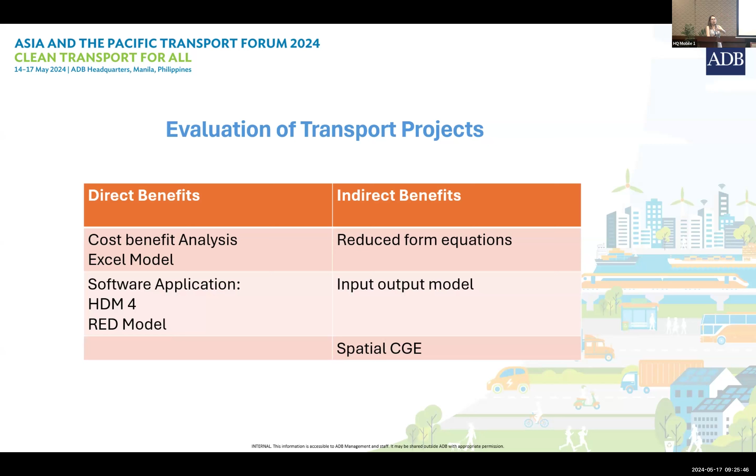And then the spatial CGE, computable general equilibrium model, which is sometimes used in projects - later I'll show you one quick project that has used the spatial CGE. This is location-based, so you have information on where the transport investments are located. You need information on a lot of things: population, land use, where the firms are located, where the houses are located, etc.

So benefits to be quantified - you would see that here. Direct benefits - I think everyone in the room knows more of this.

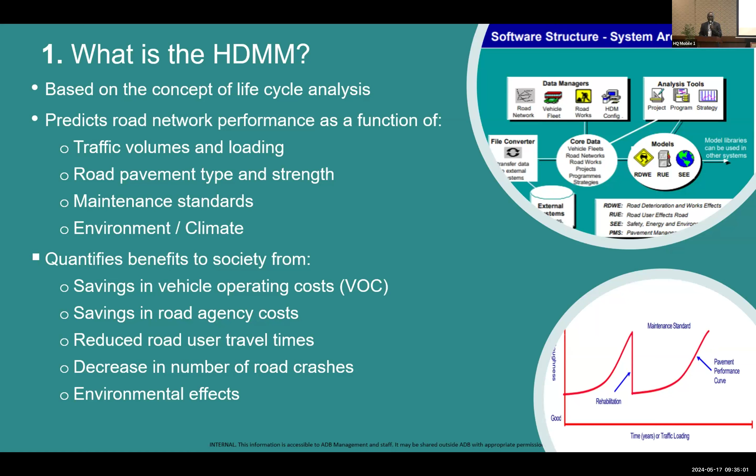After that, it quantifies the benefits to society from savings in vehicle operating costs, savings in road agency costs, reduced travel times, decrease in road crashes, and environmental effects. It applies this based on a life cycle approach. The analysis framework is still very sound actually, and we continue to use it up to now, and it works well, but things have also been changing.

So why really do we need to change? Many things. In ADB, we know that the road management landscape has changed a lot over the last few years, so the demands we're receiving from our client countries is now very different.

How do we address climate change? How do you address climate resilience? Some clients want to move into area-based maintenance contracts, so how do we make the case for those contracts? In ADB, most of our road investments at the moment are project investments, so we basically support countries in building roads and upgrading them.

But as you heard from the previous years, the portfolio for transport has changed drastically, and what we're hearing from our clients is they now want to move to system management and asset management. So we need the kind of tools that can justify this kind of investment in new areas, and that's why we're very keen to support this.

There are also many other factors. Technology has moved on, so the current HDM4 technology is probably becoming obsolete and that needs to be addressed. There's more computing power and so on. Many things have happened over the last 20 years.

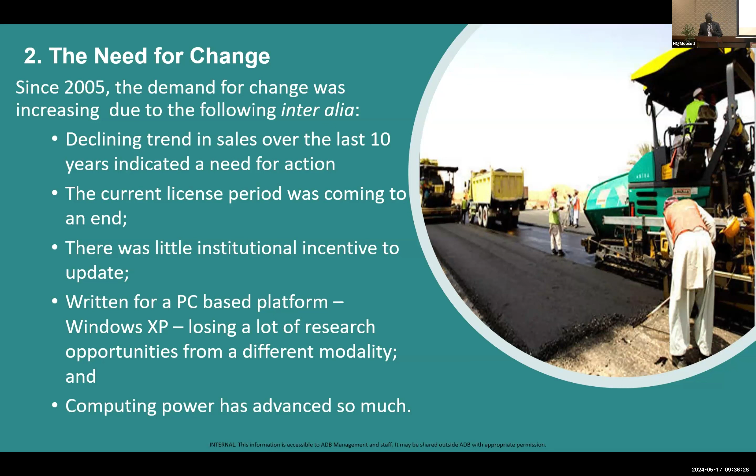In addition, there's a need to understand better how to model pavement deterioration and works effects. I work quite a bit in Mongolia, and what we are seeing now is the implications of permafrost on the performance of roads. We've not seen this before, but roads we're building are failing as a result. Even existing infrastructure is affected—if you go to parts of Mongolia and into a hotel, look carefully at the walls, you start to see cracks already happening, because increasing temperature is allowing this permafrost to melt.

This happens to many things. There are new materials that have come into play that were previously not being modeled in HDM4. We need to understand those. We need to model emissions better at all the various stages of emission modeling, and road safety benefits need to be quantified better, not in the way it is currently done. There are many things that should be addressed, and wider economic benefits, which Rowena just spoke about, also need to be considered.

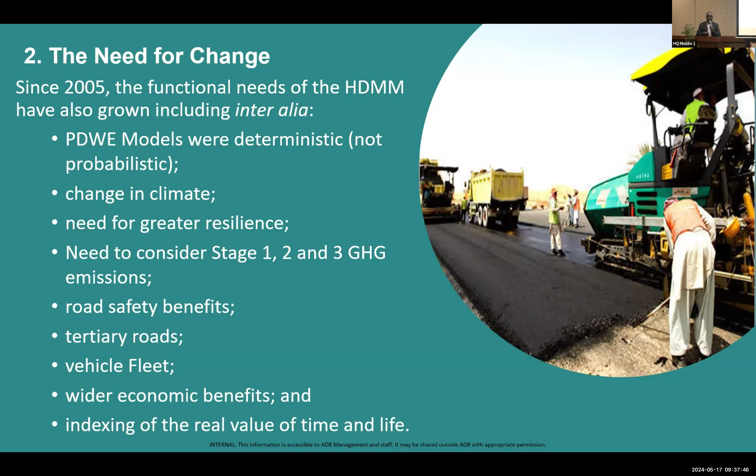During this period also, there's been a lot of work in this area, so we need to go back, understand what has been done, and then see how we can include those into the new model.

So I'll now talk about how the change is being implemented. A steering committee has been established, and ADB is part of that steering committee—you can see Jimmy is part of it too, good timing. The aim of the steering committee is basically to provide direction in HDM development. We meet periodically, typically every quarter, to discuss the developments.

Now, membership of the committee at the moment is limited only to partners who are providing support directly or in kind to ADB. But I understand from the rest of the committee that other members are welcome. So if the organizations here may be willing to provide this support, you're still welcome to participate.

So at the moment, it's the World Bank which chairs the committee. And then we have the UK FCDO, ADB, PIARC, EIB, and then African Development Bank is also coming on board, but they're yet to confirm.

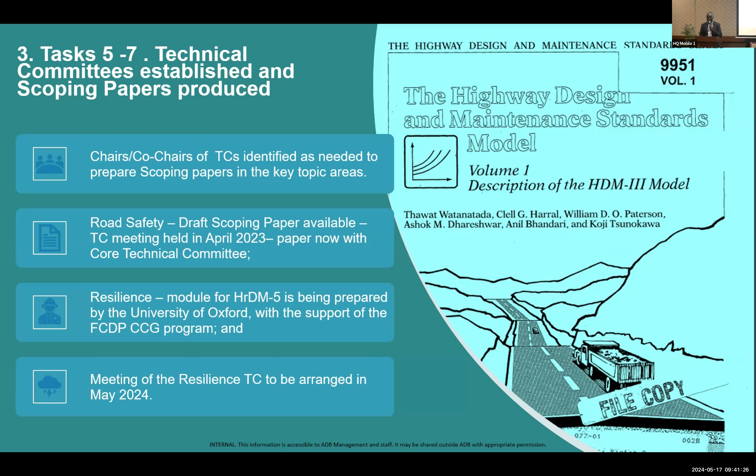So the resilience work is being done by Oxford University, who are preparing the methodology for that with the support of the FCDO Climate Compatible Growth Program. And we'll have a meeting soon to discuss that progress.

So in terms of the current status, just to highlight the IT architecture: the aim is that HDM5 will be a cloud-based system, okay? And there'll be a web-based interface where each individual user will be able to prepare their own particular project.

But the aim is to then leverage a lot of the work that is being done elsewhere. So for example, link tools developed by others, whether it's emission tools that have been developed, these could then be linked into that cloud-based system.

And also be able to draw on data that are being maintained by others. So OpenStreetMaps, digital elevation models - if we wanted to extract, let's say, gradient data, that could be drawn from there. Vehicle attributes, vehicle speeds, maybe from TomTom or Google.

The idea is that, and I think this, if it works, would be very helpful, because one of the main challenges you've been having with HDM4 is normally the perception that it requires a lot of data to deliver. But if you can leverage some of this data in a manner that can be used properly, then I think this is a good thing.

And then also it'll allow for integration of different types of tools, like the road safety tool being developed with the World Bank, so that could be integrated as well, and other tools. But in addition to that, we have to look at new models that need to be delivered.

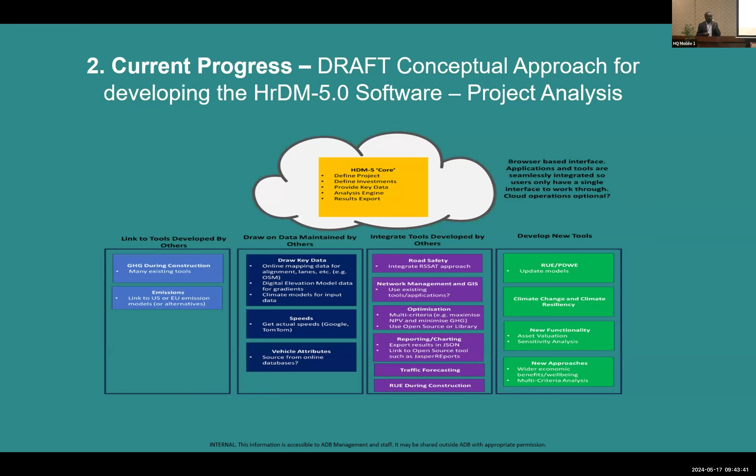So I'm not going to spend too much time on these, but just to highlight that there'll be a consortium, firm or entity, to develop this IT architecture on a design, build, operate, transfer basis.

So what we need to do is transfer the IP rights to them so they can do the development. When we looked at whether there's existing IP rights for HDM4, we could not find any because it's probably lost in the record somewhere.

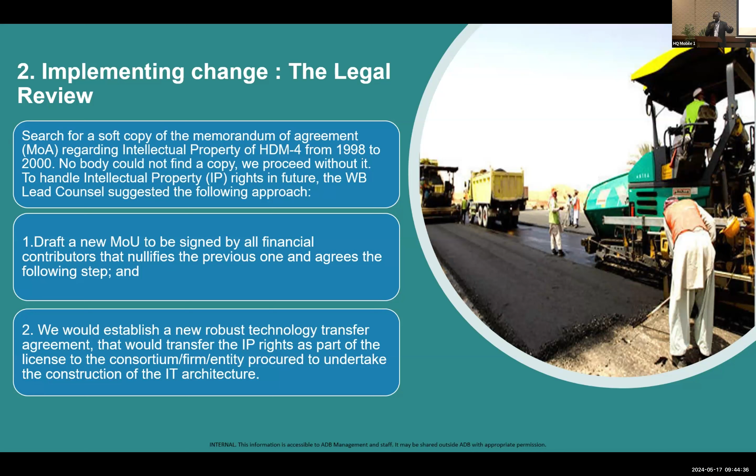So some legal work is being done where legal experts will go back to the people who funded HDM4 before and ask if they can write off the rights and give it to the World Bank. The World Bank will then create a proper legal document and transfer that to the new concessionaire.

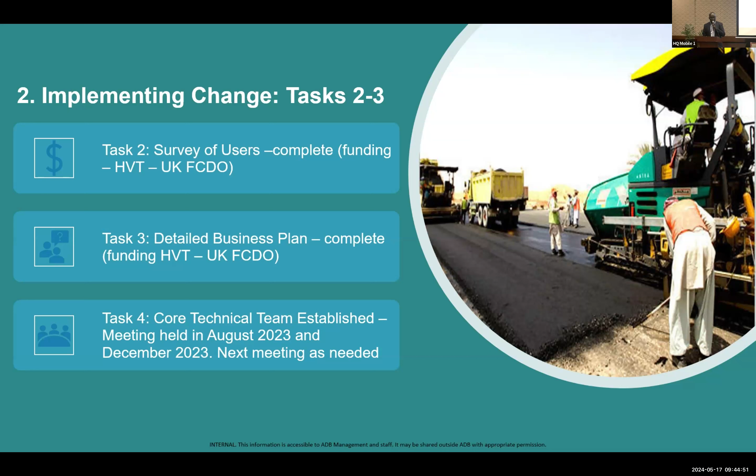So there's a lot of activities going on to support this. I'm not going to go through all this in detail. As I mentioned, this business plan has already been developed before, and the core technical team has been established. So these activities are going on.

In terms of current progress, a lot of studies, meta-analysis studies are going on. The World Bank have done a few that have already been published. ADB, myself, and Rowena should be starting to work together on some of these to produce meta-analysis which will support the wider economic benefits inputs into HDM4.

In terms of next steps, there are also works ongoing or under procurement to do a number of gap analyses in deterioration, user works effects, functional review of the software itself, and the terms of reference for the architecture has already been produced.

I think it's now in the EOI stage for the firm that will design the IT architecture that I showed earlier. I want to mention that was probably the most difficult aspect to do from a funding perspective. We required substantial funding to get that going.

So the government of Japan stepped in and they will fund most of the IT architecture design so we can move on. So that was good. That was particularly the main activity that delayed our development according to the original program.

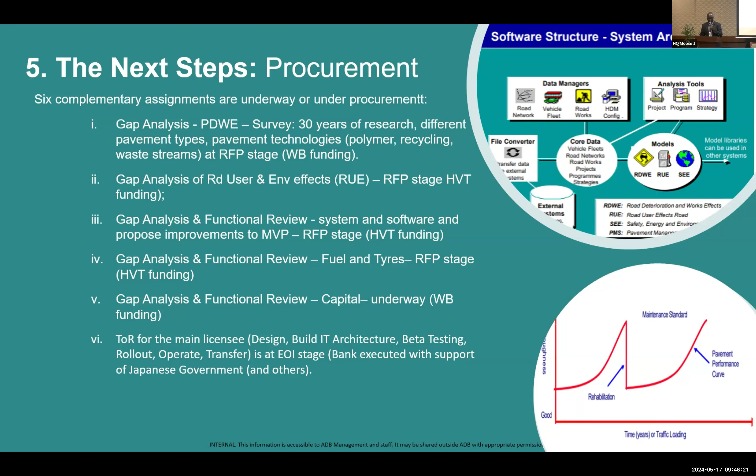Okay, so I won't go through that. I'll stop there, but just to mention there's also a website you can go to. If you have questions, you can share them with me and I'll try to find answers, whether from the World Bank or others, so we can get feedback to you, okay?

So I just wanted to give you an update on what's going on and let you know that HDM5 is coming. You can still use HDM4 perfectly well. It should not stop you from doing that. Thanks.

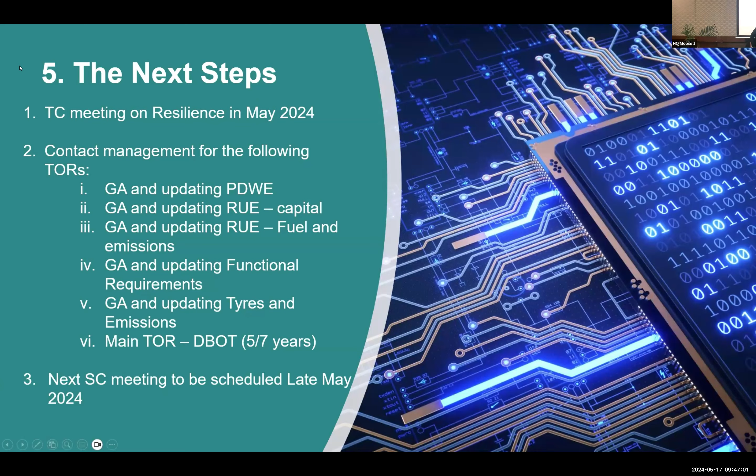Yeah, there's a few of us, I think, around the room and online that are involved in some of those studies. So my original work was on vehicle fuel emissions and fuel consumption vehicle emission modeling, and I'm updating that at the moment for one of the projects.

It's now my privilege to invite Professor Kerali, former professor—is it, what do you call it, do you still retain the professor? That doesn't matter—to the stage. As I said earlier, he's been involved with HDM4 for many decades, and after the University of Birmingham, went to the World Bank, ended up there for a couple of decades as a country manager. So his experience spans research through implementation through managing projects. He's here to delve more into HDM5 for us. So Henry, please.

Thank you very much, Ian, and good morning, everyone. My presentation will be very much building on what Michael and Rowena mentioned earlier. It's really to look at the scope of HDM5 and also to engage with you on what are the priorities from the perspective of the Asia and the Pacific countries.

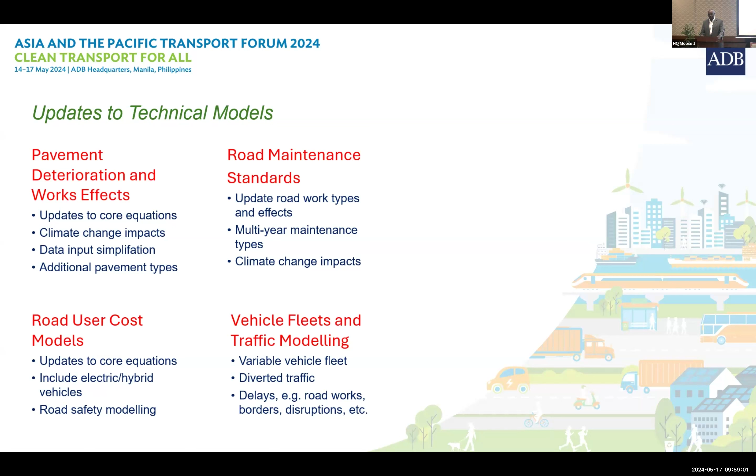One area that will need to be expanded is vehicle fleets. Rowena and Michael already mentioned the need to incorporate electric vehicles, which have completely different performance, obviously zero emissions, but there are other types of vehicles and fleets that need to be incorporated. Diverted traffic, for example, needs a network level analysis as opposed to looking at single roads.

And then finally, the enhanced capabilities. We talked about climate change impacts. There's also consideration of low volume roads. At the moment it's done using the RED model, as Rowena mentioned, but there's no reason it can't be done in HDM5 because the CBA framework is the same. So it's really about how you fine tune that into one tool that can cope with different types of roads you're analyzing.

Asset valuation has been talked about for many years, decades, but has never been incorporated in HDM. There's a thought that it could be done now. All the data is already in the system—your pavement characteristics, construction costs, and so on—so there's absolutely no reason you can't include asset valuation.

So these are some of the things that are coming up, which we will be discussing. There is a questionnaire which will be issued later—I think Ian will give that at the end of the sessions—which we'd like you to fill out from the Asia and Pacific point of view: what should HDM5 include, and what are the priorities for Asia and Pacific countries? The questionnaire will try to elicit your perspective. You may not be an expert on HDM, but you're a practitioner, so from that point of view, if you know HDM4, what is missing? If you don't know HDM4, it doesn't matter—what would you like to see in HDM5? I'll stop there, and the questionnaire will be issued later. Thank you very much.

Thank you. So, as Ian said, I have 30 years as an old acquaintance of HDM4, but I'm more a practitioner. I'm a consultant doing HDM4 for network analysis, policy development, and project analysis. Obviously, climate change comes up all the time as an issue, and there are some things we can do with HDM4 and some things we cannot do with HDM4. I wanted to give you some hints of what can be done for those who are already practitioners, and maybe give you some ideas on what you'd like to see in future HDM5.

First of all, we have to be aware that HDM4 is a pavement model. We are modeling pavement deterioration and then the effects of this deterioration on vehicle speeds and vehicle operating costs. That means, generally speaking, we are modeling deterioration over time, and we do not model sudden events. So we do not model disruptions. This is something we cannot do.

The second thing which we cannot do, because it wasn't included in HDM4 - and I'm advocating strongly to include it - is that we cannot very well model the absence of routine maintenance. For example, drainage works are essential in terms of climate resilience and climate adaptation. We all know the absence of drainage and routine maintenance will affect your pavement life. How to reflect this in HDM4 is not really straightforward these days. I made some small modeling and preparation for this workshop.

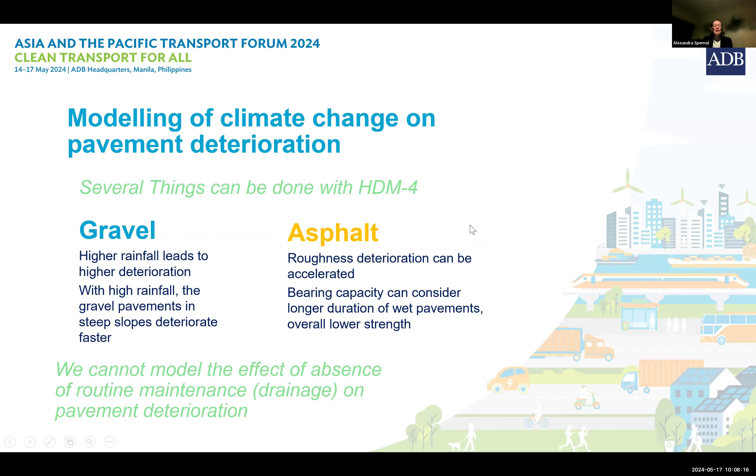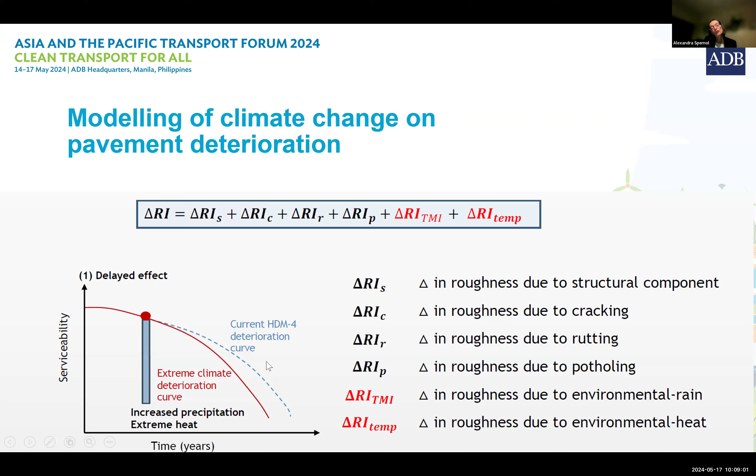So these are proposals for modeling climate change and pavement deterioration. As you know, we have roughness deterioration in a curve, which you can see here. The current HDM curve is the blue curve, and with extreme climate, our deterioration will be faster. We would still have roughness due to structural condition, cracking, rutting, and potholing, but we would include additional factors to model more closely the rainfall and the heat. That would overall accelerate the deterioration over time.

So I made some models. Like Henry said, the reporting in HDM might not be that good, but if you are good in Access and Excel, you can still see it.

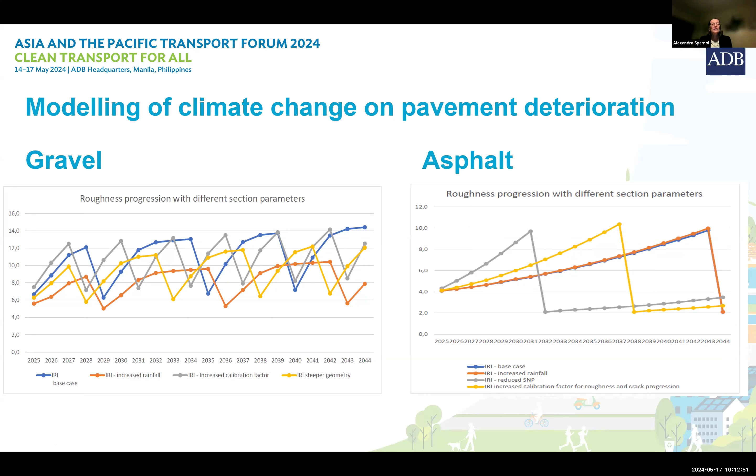And then you have the failure—that is the washout in case of flash floods for pavements, or bridges where the piers are failing under the high water.

These disruptions require implementing a detour. The problem is that we have to have a probabilistic approach. We don't know when these failures are going to happen, or even if they are going to happen. So we have to look at the likelihood of an event, and we have to look at the vulnerability - how much this will affect the people around.

What are the repair options? How long will they take? This applies to every single event - it can be a bridge failure, a landslide, mudflows, avalanches, washouts. The principle is that you stop your road not for 1 hour, 2 hours, or 1 or 2 days, but for serious time - the time to make emergency repairs - and people would be asked to use a detour, which can be more or less long.

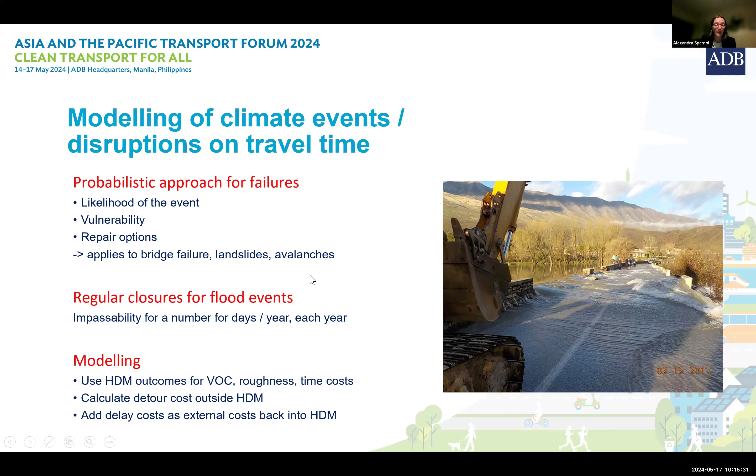In case of failures, the road will be unpassable for a short time. We don't imagine that countries would leave it - even poor countries like Laos have emergency response. Nobody would leave people completely disconnected for a long time, especially on a national road. So the short time is usually for light vehicles - you can put in place a detour in 1 or 2 days. If you have heavy vehicles, reinstating passability takes a little longer - most of the time we implement a Bailey Bridge or something similar. Eventually you'll continue to have load or speed restrictions for a long time - the time to reconstruct, the time to clear fully. For a bridge, that can take up to 18 months.

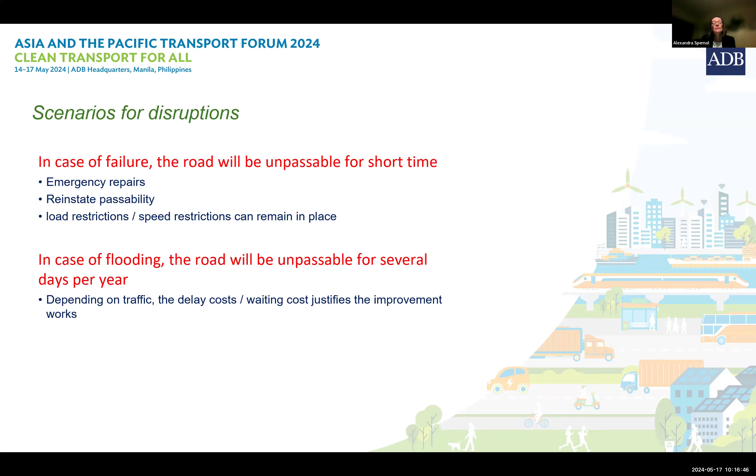Then I come back to the flooding and the delay cost. For regular flooding and regular closures, which happen every year, this is just delay cost and waiting costs. The interesting thing is that these costs are so high that they basically justify all climate improvements.

This is, again, my famous bridge, located on the Adriatic coast, on the Mediterranean Sea - my little bridge is the red point. It's on a national road that goes to Greece. If you want to use this road and the bridge is closed, you have to start your detour here to go into Greece on the south side, or start from here depending where you're coming, and go on the other side. The total detour, including different border crossing restrictions, is about 210 kilometers.

On this road, traffic in 2020 was substantial - we're talking about 7,000 vehicles a day, with substantial truck traffic. If we just close it for 1 day, we have a GHG cost of about $18,000, compared to $80 when you just cross the bridge for this 1 kilometer. Even compared to the 40-kilometer section where you take the detour, it's marginal - but the GHG emissions in the detour scenario are absolutely huge.

For this bridge, the reconstruction investment cost would be about $1.5 million, compared to $120,000 for 1 hour of waiting time with this traffic - this is cargo delay, plus working and non-working time of passengers. At $120,000 per hour, you can see that even in 1 day you've already recovered your investment.

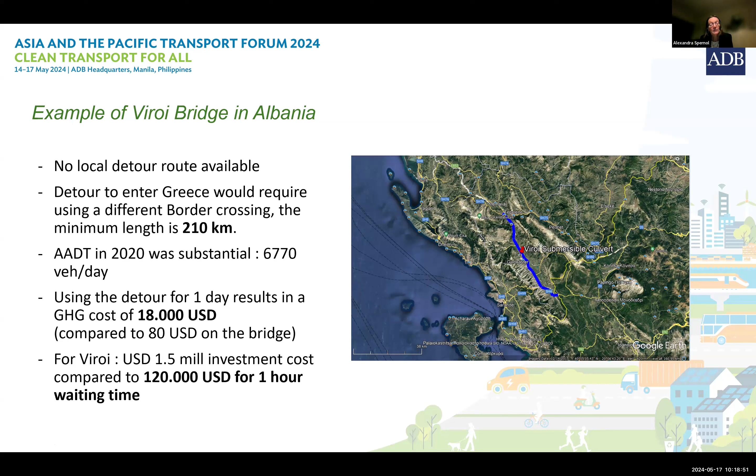I've tested this on many, many cases. And of course, if you have a rural road with a village of 20 people and 3 motorbikes, it wouldn't work anymore. But it would work on probably 90% of the infrastructure we are now managing in many countries, which we would typically model with HDM.

So even without an improved HDM5, this is my small conclusion: the climate effects which are affecting the deterioration over time can be taken into account. If you're good in HDM, you can fiddle around, adapt it, calibrate it, so that your climate effects over time can be taken into account, and we should do this.

But the disruptions, we cannot do anymore inside HDM, but we can do it outside of HDM. As I said, it's a very important economic cost, it would justify most interventions. The way of doing it is to model your road normally with HDM, then model the detour with HDM, include these, and then compare basically the economic costs and benefits of this option, including the reconstruction or not reconstruction.

And where the probabilistic thing comes in is that I can model the failure in year 1, in year 2, in year 3. And I can even say my failure is only 50%, so I would take only 50% of these benefits. And I can tell you that it still would work. Climate resilient investments can still be modeled and justified in this way.

Thank you, and I will give over to Theuns. Ah, no, you said you will do it after the break, right? Okay, yes, yes. Hopefully, first of all, thank you. Thank you, sorry for not being in Manila, but that's the best. That's okay, thank you.

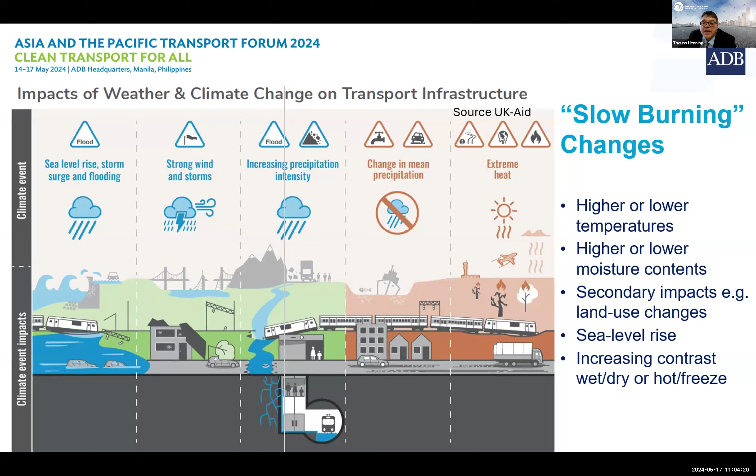There's definitely a place for HDM in looking at the impacts of shock events, but what we often find from a financing perspective is that shock events would be covered under emergency funds, whereas changes happening slowly over time are often not catered for in any specific financial instruments. So that is why this is so important.

So what I'll be talking about are the typical pavement issues that may occur as a result of climate impacts: increased potholes, rutting, cracking - with cracking in particular from freeze-thaw actions - and then raveling or chip loss of surfaces.

Now, one thing that came out in the previous session that was quite a good discussion is that climate is just one of the impacts. We also see many countries in Southeast Asia faced with poor material quality, in some cases poor construction quality, and extreme heavy vehicle loading. I've done some work with Ian in Indonesia, and there we were really astonished by the vehicle overloading problem they're struggling with, lack of maintenance, and then on top of that, the climate. So we need to incorporate some of this thinking when we get to the modeling side of things.

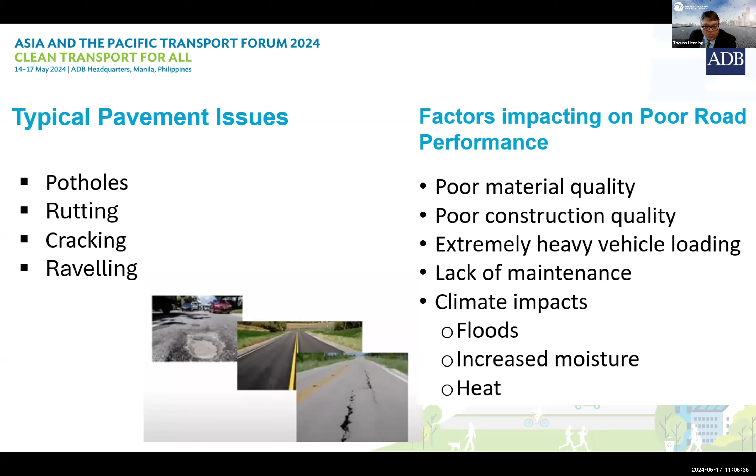So one of the first steps I would really encourage you to do is to stand back and think: number one, what is the issue you're concerned about? Which part of the pavement is that going to impact, and then how are you going to model them?

Typically, the type of analysis we would do to understand those impacts has been covered in Alexandra's presentation, so I'm not going to dwell on that again. There are two other types of analysis that I would like to discuss.

The first one is - although we don't necessarily look at modeling the impact of shock events directly - what we have seen in many countries is that due to a shock event, your main route may become impassable or closed. We then get vehicles detoured onto local roads, sometimes low volume roads, even unsealed roads. Of course, those roads are not designed to carry that sort of traffic, and they go into rapid deterioration. So certainly for many countries, this is sometimes the biggest issue.

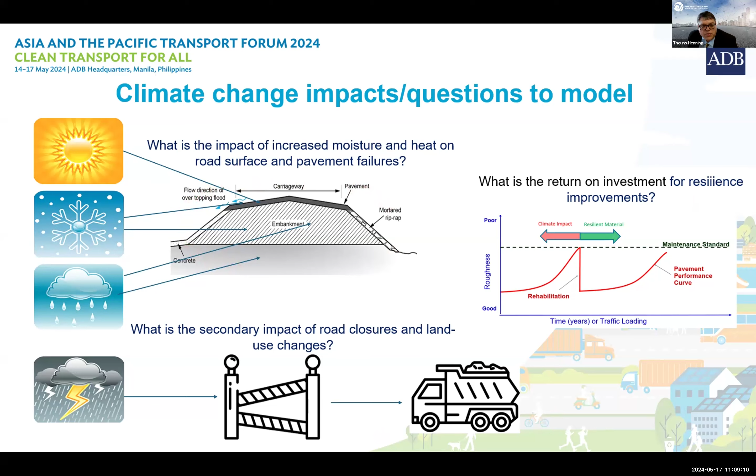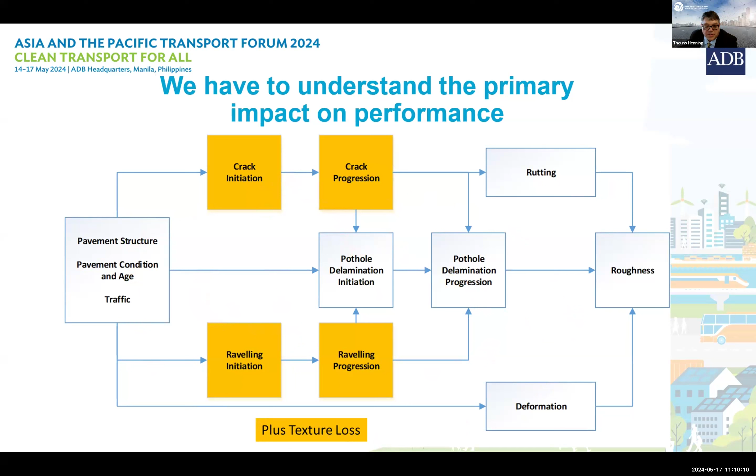The biggest problem we have is we often don't have the data to do this type of analysis. I was involved with a study that looked at alternative surfacing solutions, in particular epoxy mixes into asphalt and chip seal surfaces. For that, we had no data, virtually no data. We did have a bit of

Laboratory data, but apart from that, no other data to inform our models. So for this HVT research, we have looked at how we can harness different pieces of data to help us with the modeling process. What we've done was use the long-term pavement performance sites in New Zealand and laboratory results to adjust some of the outcomes on the New Zealand trials, and then we've extrapolated that for the application.

In this case, we've looked at a case study in Africa. So by combining laboratory results and some field trials, and we were also fortunate in New Zealand to have the accelerated pavement testing results, we were then able to calibrate and use the models in our impact assessment.

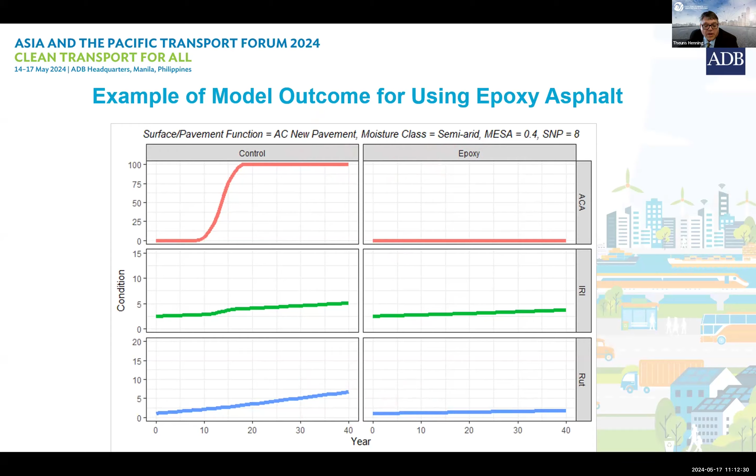Just a few words I'd like to raise about alternative materials: there is no wonder solution that's going to solve all your problems. I would advise you to look at Road Note 31, where we've looked at all the different solutions in different climate conditions. So if you've got a colder climate and you're mostly concerned about cracking, you're probably going to use something quite different to the solution you need in areas with significant heat increase. So there's different types of technologies for different solutions.

And then you need to use the HDM type analysis to give you a good outcome on understanding the long-term cost impacts of using the different solutions. So that earlier work I was referencing, that report is also available. You're going to have the slides - I've included the links to these reports so you can look at it in more detail. Also, last year in the Transport Forum we had a good presentation on Road Note 31. If you've got access to that, I encourage you to go and look at that presentation as well.

So for the moment, I'm going to just stop there, Ian, and I'm happy to take any questions.

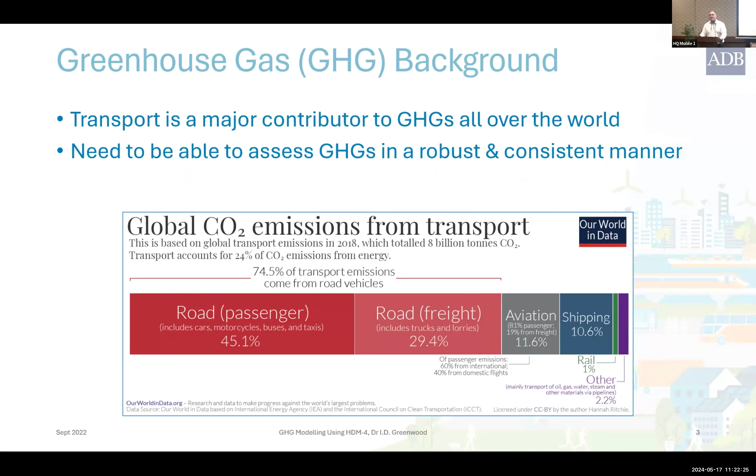Oh, here we go. So I think we've seen these sort of things plenty of times before. Greenhouse gas emissions - it's big numbers. You can look at all sorts of reports, but it always adds up to a big dollar or a big environmental cost associated with the transport system.

Additionally, for the World Bank, the ADB, Inter-American Development Bank and others - they've all made commitments to reduce their emissions, or to make sure their projects are aligned with the Paris Agreement. There's a process that projects go through, but the real question was, how do we know we're actually meeting that commitment? Against that is where Michael stepped in and said, okay guys, give us a tool that can actually look at this and say, are we doing the right things? I guess also there's probably a bit of nervousness within the ADB that at the top end there's these commitments, yet such a big part of the lending is in the transport sector that it was like, are we still going to be able to actually do transport projects?

So if you look at the total scope of what is in the greenhouse gas emissions, on the road we've got our internal combustion engines, we've got our EVs. But if you go upstream, you've got vehicles being manufactured, you've got power supply, service stations. About a third of the emissions of your vehicle actually happen before the fuel gets to your vehicle, so there's big upstream emissions. And then there's also all the emissions associated with works.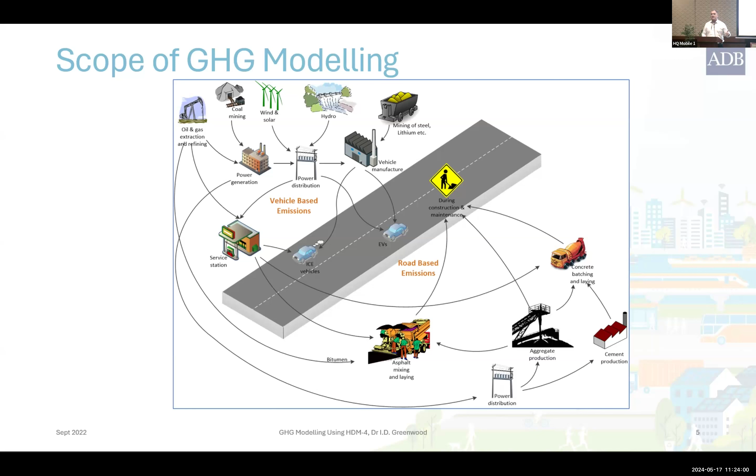Now, when we developed HDM4, we thought - and this is going back to the mid-90s, we did the research, although the software didn't come out until 2000 - we were doing well, and we modeled that. So at the time, we thought we were well advanced.

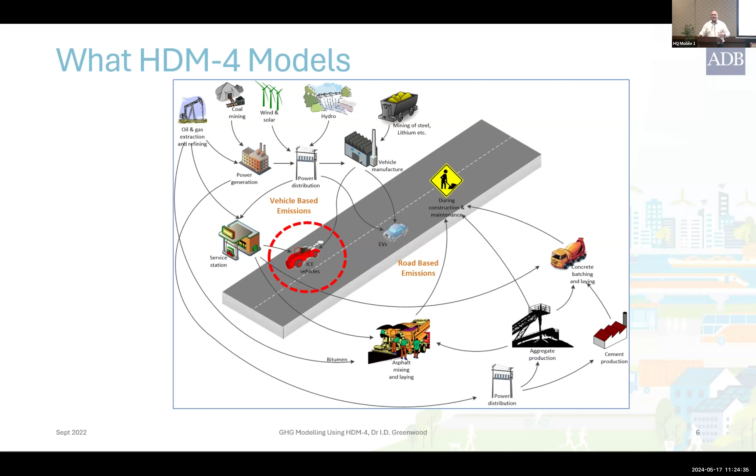It was interesting. I don't think anyone ever looked at the outputs from HDM4 for emissions, probably for the next 20 years. We had one or two, but I think for most people the emissions report was the unused, unloved cousin, and suddenly it became popular. And then we realized actually we had quite a constrained model as it was.

The model itself only does a limited amount of the overall emissions. It doesn't quite get the CO2 equivalents, because there's a couple there, methane and nitrous oxide, that we didn't model. So it's probably underestimating by a couple of percentage points, which in the context of all the other sensitivities is probably not too bad, but there are some items which are not quite correct there.

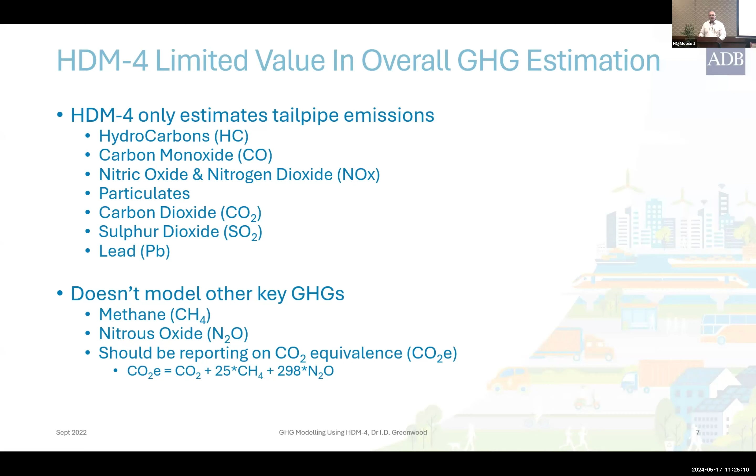The other thing we had to look at is the fact that there's a difference between emissions and who actually reports on those emissions. So if we look at it in the New Zealand context, if a road gets rough and there's higher vehicle operating costs because a vehicle wears out sooner, we recognize those costs in our New Zealand modelling.

But all our vehicles are manufactured offshore, so the fact we have to buy more vehicles to do the same kilometrage doesn't actually cost us environmentally - it costs a different country environmentally. And if we've got EVs, the reporting for the power generation sits in a different bit of reporting.

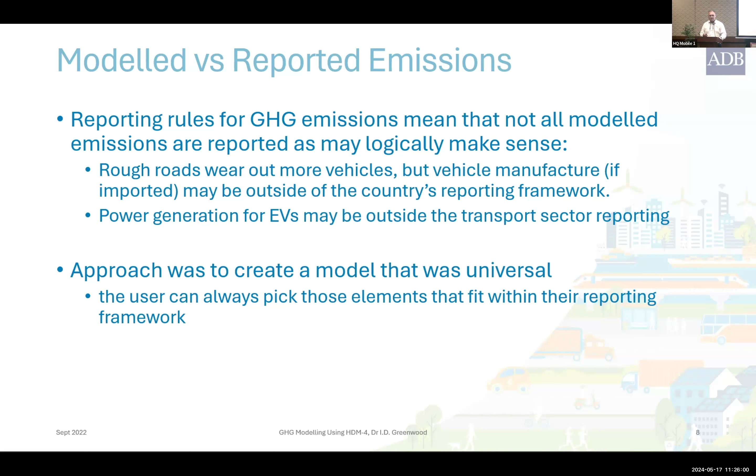So what we tried to do was create this model that allows it to report all the emissions, but you can choose which ones you want to actually bring into your model to make it more flexible. So we wanted a model that's credible, sensitive to the investments - because there's not much use having a model that's not - and could actually predict over those short and long terms.

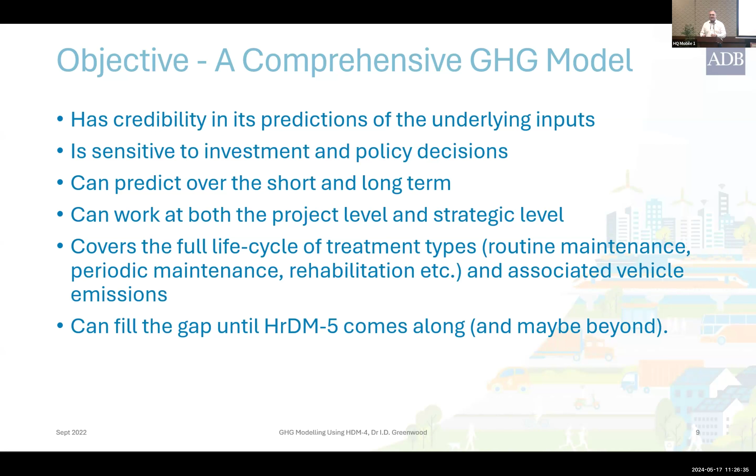And I guess implicitly we were thinking this is something that would fill the gap until HDM5 comes along. Maybe it goes beyond that. Maybe it becomes the core of HDM5. Given my linkage from HDM4 through this into HDM5, I guess we can draw some conclusions before the study's finished. But conceptually, what we've got is a model that looks at how a road deteriorates over time.

This is what HDM is doing itself, and that leads to some pavement deterioration. We get more deflections, the pavement gets softer, it gets rougher. Your rolling resistance goes up, and as a result you use more fuel, so you get more emissions. At the same time, your vehicles wear out more often, so you need more vehicles to be manufactured.

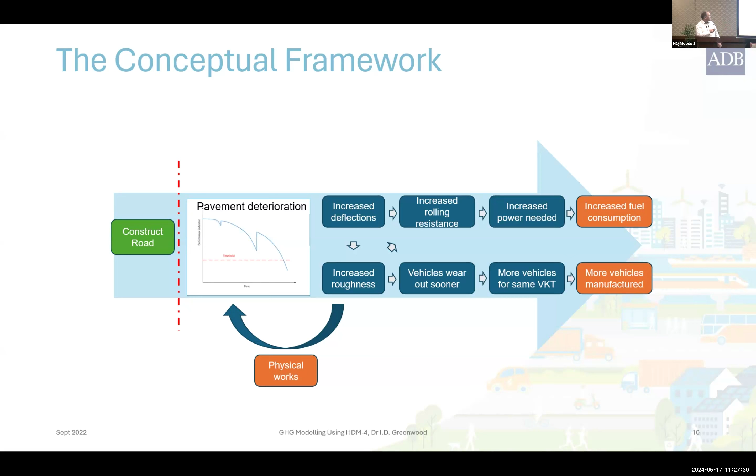And then you're also doing work here, which is the physical works, and back here you're constructing the road. Because of the way our model's set up, this sort of sits outside of it - the initial construction. It can come in, but the part of HDM we were looking at was very much aligned with all of this part.

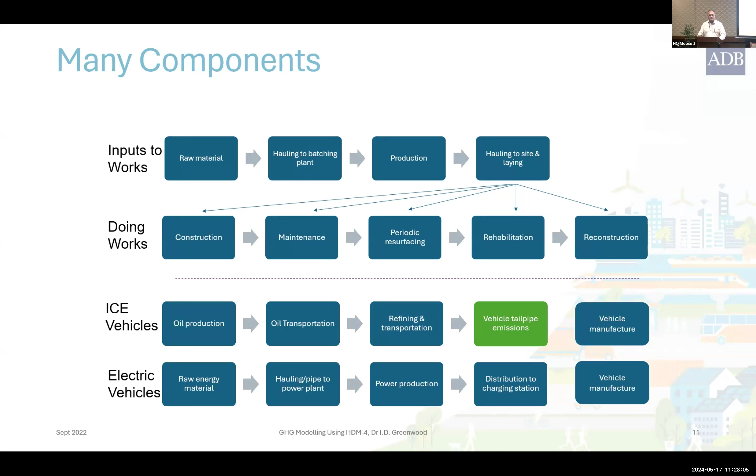So lots of components to look at. As I said, that one in green is what HDM4 gives us by default, and then we built the model around that to do all the rest. HDM tells us what quantities of work we do, but it doesn't do the vehicle manufacturing or any of these other parts. So we built a tool that expanded the capability of HDM4 to give us a full picture of things - it links straight in, grabs out all the data, and then we build around it.

The toolkit itself, there's a few inputs that we have to use. So for all the different work types, which again it brings straight out of HDM for us, we put in the emissions associated with it.

We put in the emissions associated with vehicles, but the tool also allows us to deal with transition of vehicles. So within it, we can look and say, if we've got a policy of encouraging a country to transition to EVs, we can say we're going to take our old car to an electric car or whatever it happens to be. And it's quite interesting that if that policy also requires things like charging stations and other things to be constructed, we can also bring all those into the actual model.

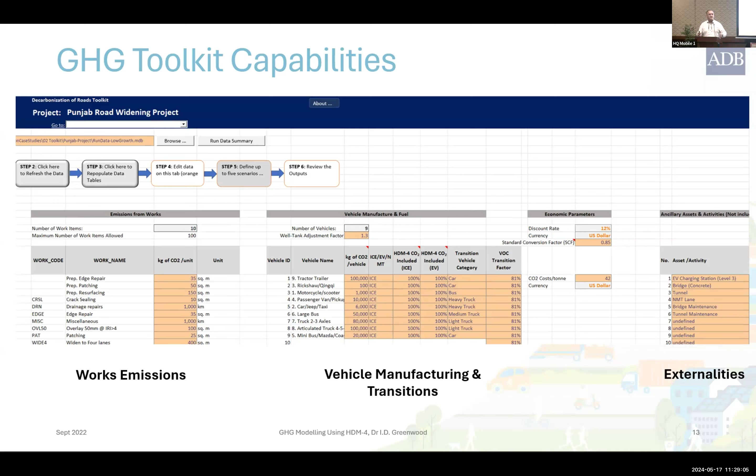So when we are modeling in here, we're modeling a full scenario. We can say this policy would achieve this, and here's all the things that go with that policy.

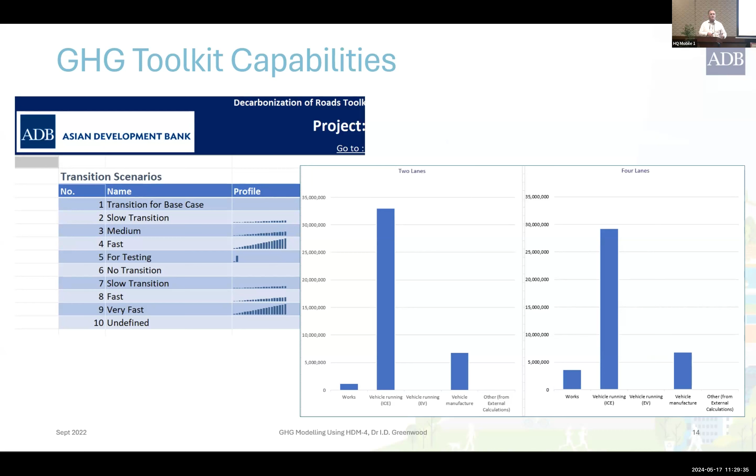The sort of outputs we get, well, the small bit, so we can set up whatever sort of transitions we want. So we can test and show, well, if we've got a highly congested 2-lane road, we can upgrade it to 4 lanes. The emissions and the works go up, but the emissions and the congestion comes down. So we can show that there are emission reductions from constructing roads. So there's all of that comes on.

Equally, we can look at the impact here. If we reduce the budget for looking after a network of roads, we can show that, yes, you're doing less, so you're using less emissions, but the vehicle-based emissions are going up even quicker. So we actually end up overall in a worse situation. So not looking after the network, under-investing in the network, yes you saved a little bit of works emissions, but actually drove your overall emissions up quite a lot.

Like I said, it splits it out between the works, the vehicle running for ICEs or EVs, manufacturing, and also any other factors you wish to bring in, and we can get it all the way down to individual vehicle type.

So what our analysis shows, and this brings us back to the green roads things as well that we've been talking about throughout the week, and a lot of what sits in this sort of decarbonisation space.

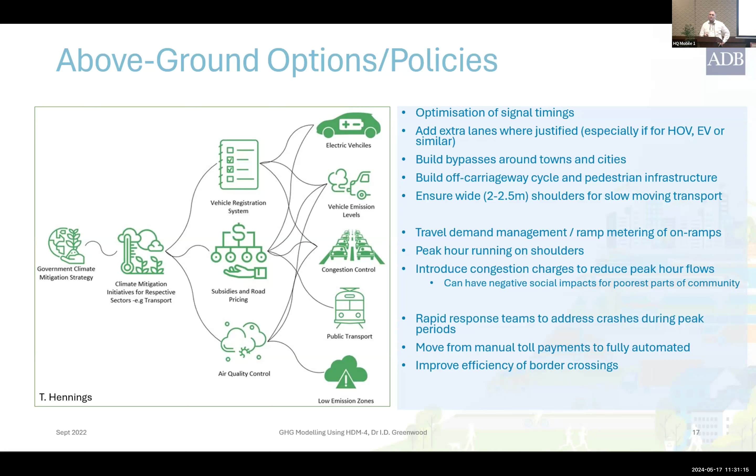Above-ground options and policies, again, a lot of these are what we would expect. But when you stand back and look at things, there are a few other contexts that come through.

So one thing we have to identify is continually patching a bad road is actually bad economically. It's also bad environmentally. Maintenance patches have a high unit rate of GHGs, and they have a very short life cycle typically. So the unit rate of output of CO2 from a maintenance patch, especially when it's not one that's actually fixed the problem, is not great.

And as Tian said, if we've got a rough road, if it's high texture, high deflections, they all increase your rolling resistance of vehicles. So what we do know is that if we look after the road, we are also looking after the environment.

So they're not counterproductive. We did the numbers in New Zealand, and on a typical sort of rural highway, maybe you've got 5,000, 10,000 vehicles per day, the emissions by the traffic congestion at the work site to resurface the road will typically be greater than the emissions of the bitumen going on the road.

So we get into that point of saying, well, you might look at the bitumen and go, that's the oil, but the stuff you don't see is actually greater. So we need to be looking after the road. Not looking after the road is not a way to save the planet.

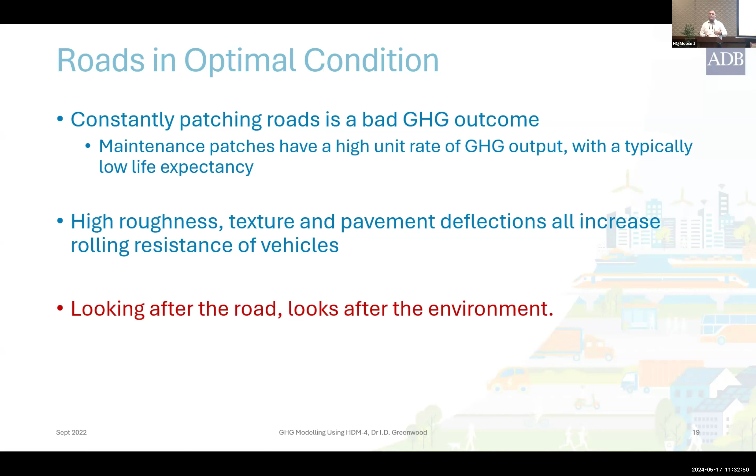We need to make sure that we're not trying to save things. This is where some of our projects, even in New Zealand, have set targets on big construction projects to reduce emissions during construction by 30%. And you go, that's great. But you've just pushed up your life cycle emissions, which is far worse.

I would rather take the emissions up front, and we need to look at how we construct things that can be maintained. So on this one project near me, they wanted one lane each way. I said you should be building very wide shoulders so that in the future, when you come to maintain this road, you can keep it open all the time. Because the moment you have to shut this road to do work, you've offset every single saving you've made of emissions otherwise.

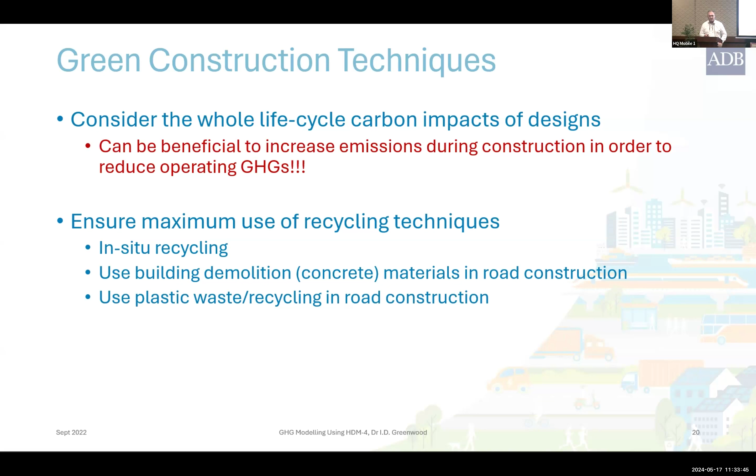We also have to do work efficiently. So the way we set out the time of day we do works and how we do our closures becomes really important. Especially if you're in a busy network, you don't want unplanned disruptions in the middle of the day.

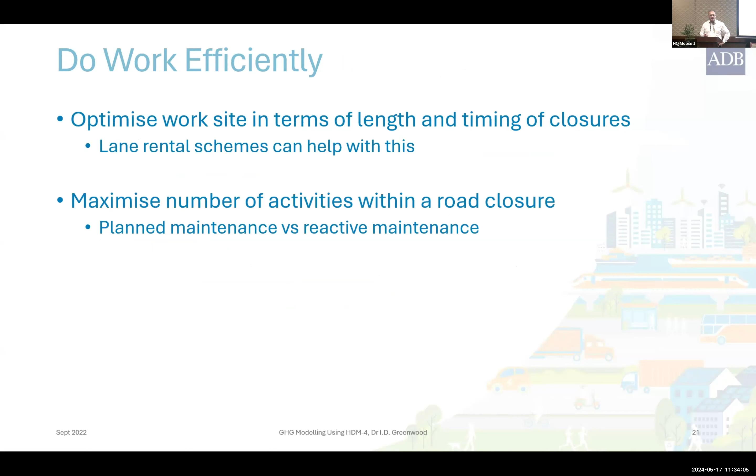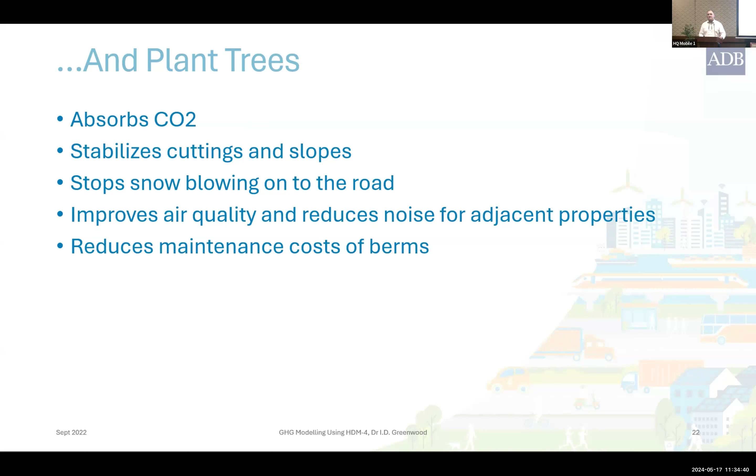And you can always plant trees, which is multi-purpose. If you've got an area with snow, trees can stop that blowing across, and they stabilize cuttings and everything else. Some of these initiatives, which those who sat in the Green Roads session would have seen, have a primary purpose but also secondary benefits. You might plant a tree to sequester CO2, but it actually has a whole lot of other benefits for you across other aspects.

So I guess where we got to is that when we did this work, it reassured us that good asset management is actually also good environmental management, and also good economic management. We don't have a misalignment. It's not like you can argue I'm not looking after my network because of some other X, Y, Z.

For the medium to high traffic volume roads, 80% or more of the emissions are coming out of the tailpipe of the vehicle. So it doesn't really matter what physical works you do, it's all about how you do it. Optimizing your work sites and the time of day you do them is going to have far more impact than tweaking a little bit of a decision around what you actually construct.

It's not to say don't chase that, but if you put your effort in, you might save 1 or 2% with a better way to construct a road or low emission construction vehicles. You could save far more just by doing the road in a different way. For very low volume roads, like remote Mongolia, that balance starts to change, and looking at how you construct it becomes very important too. That's all good asset management, and everything links through.